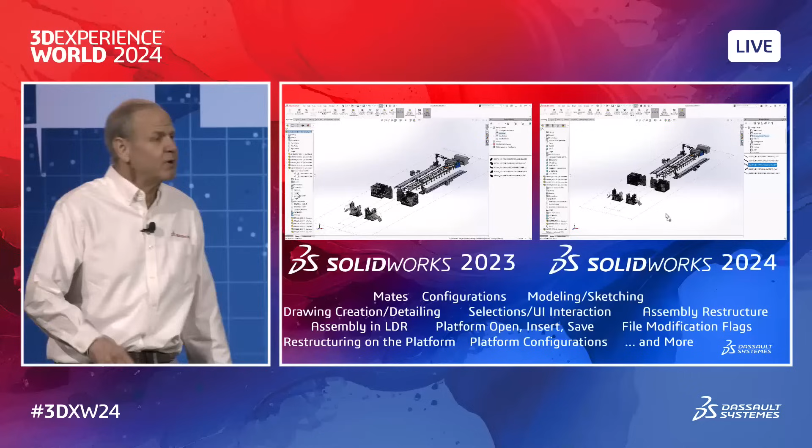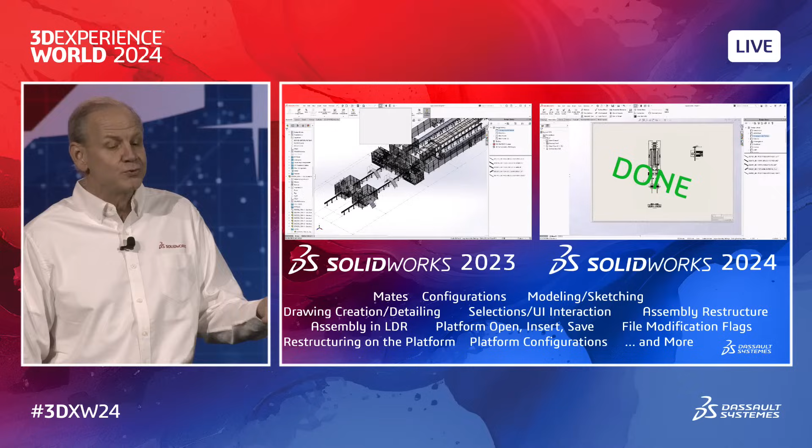You probably know every year we focus on improving the slowest operations, and we typically make big improvements, so users are delighted when they hit those areas. Well, we continued that effort this year, but we also looked at workflows that are most common to all users and focused on improving them end to end. That's what you're looking at on the screen right now. We looked at typical areas like assembly modeling, drawing and detailing, configurations, etc. And on average, we got roughly 30% faster. So now your average user should experience a significant performance improvement. What do you think about that?

Now for the enhancements, and we have some great news, because now we put them in service packs throughout the year. You no longer have to wait for a major release. You'll find a bunch in every SP. For example, we released the step import filter in SP1.

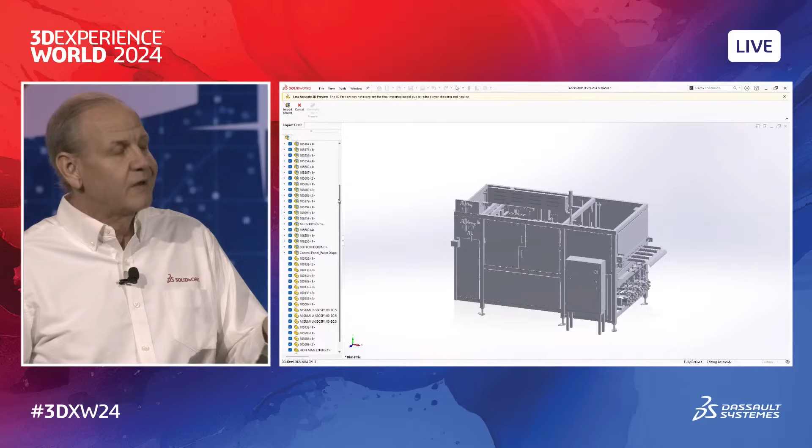If you've ever had to import a huge step file just to use a small part of it, you're going to love this enhancement. Now, upon import, you quickly get a full assembly tree and optionally a graphics preview from which you can select just what you want. And then boom, you get just that portion imported. Saves a ton of time, and it's there in SP1.

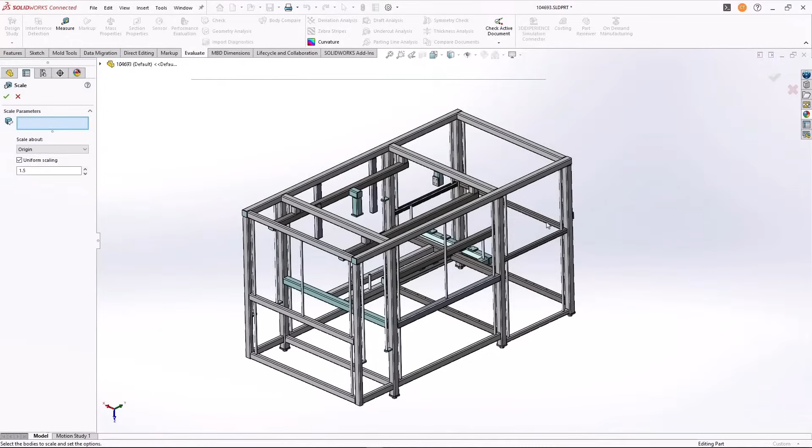But this next one is really cool. We've always had great assembly features, but they only remove material. There are times when you want to add material, for example, modeling weld beads as actual solids, or thick coatings as a solid offset. In 2024, we implemented an alternative way of creating assembly features. You can now have a twin of your assembly in the form of a multi-body part with full associativity. So think about it, this means you can effectively add part features to an assembly, any part feature, ribs, curves, combine, intersect, you name it. So I think people will find a million ways to use this enhancement.

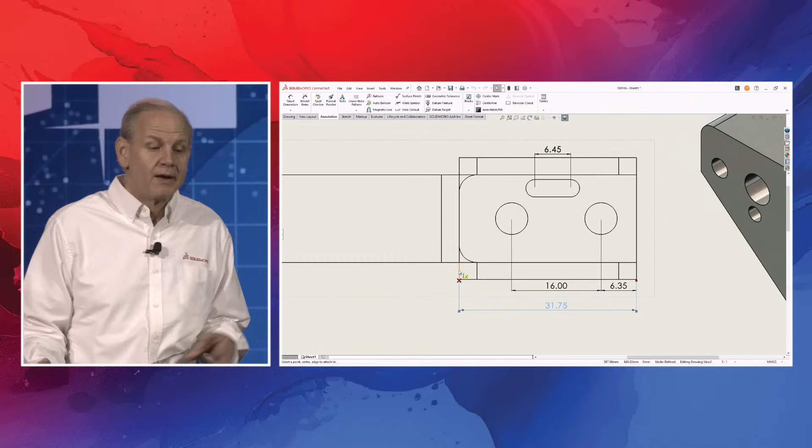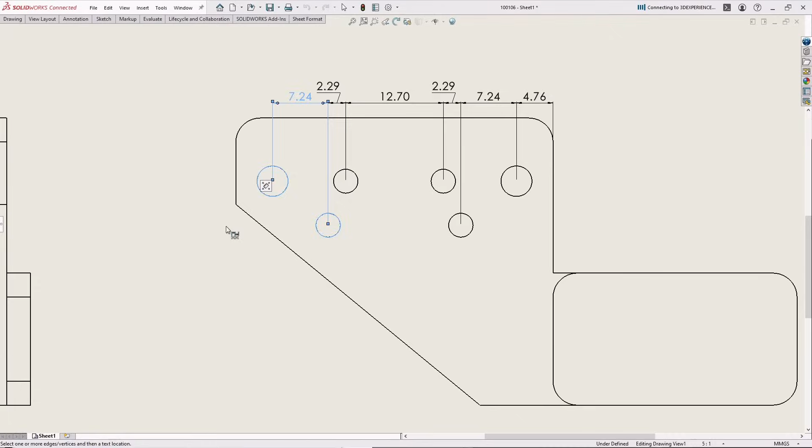Next, drawings. Sometimes you end up with dangling dimensions, for example, if you delete a feature, a face, or an edge that was referenced by a dimension. Now with our improved workflow, reattaching dangling dimensions is easy and it really works perfectly every time. In fact, this stuff is so robust, you can reattach any dimension. It doesn't have to be dangling, so you can repurpose an existing dimension. We also improved chain dimensioning, so all the dimensions stay collinear as you add them. If it gets too crowded as you're adding a dimension, one pops above with a leader that stays consistent with the standard.

But my favorite enhancement: now you can save SOLIDWORKS models back to an earlier release, complete with features. So they're true native models, as if you created them in that earlier release. Now users on different releases can work seamlessly back and forth, editing back and forth. Here you can see a sheet metal part saved back to 22, so the manufacturer has access to all the features, including the flat pattern.

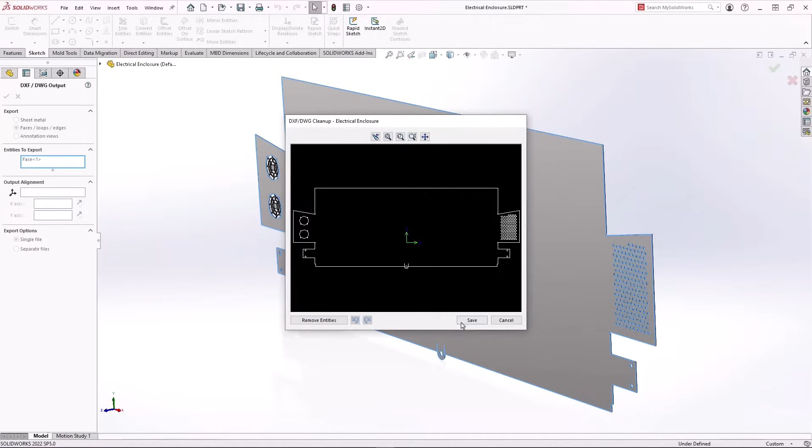Of course, we will continue to add new features to SOLIDWORKS, so we've provided a handy tool to identify any feature incompatible with the previous release so you can deal with it. I'm going to tell you, it's amazing how well this stuff works. It's rock solid.

Those are just a few of the enhancements in 2024. For more info, check out the What's New videos on solidworks.com, and also check out the What's New right from inside SOLIDWORKS help.

All of our enhancements are driven by our user community. So come to the Top 10 presentation on Wednesday afternoon, and you'll see we implemented 35 directly from the Top 10 survey this year.

Thanks, Bruce. And we'll review that work from home policy for you especially, right? Thank you. Let's see if you can continue. By the way, Bruce comes to work every single day, so it's a joke.

And at this point, I would like to invite Sally Alani, who is going to come with Kevin Hopkins and Sam Melo to talk about SOLIDWORKS with the platform. Come on, Sally.

And if you didn't recognize him in this nice clothes, he's the guy who has challenged the product definition team. So Bruce and team, they're under fire. I'm ready for it. Dance off.

Thank you, Manish. Thank you, Bruce. Those were some amazing enhancements. Kevin, you are our very first SOLIDWORKS customer who adopted the 3DEXPERIENCE platform.

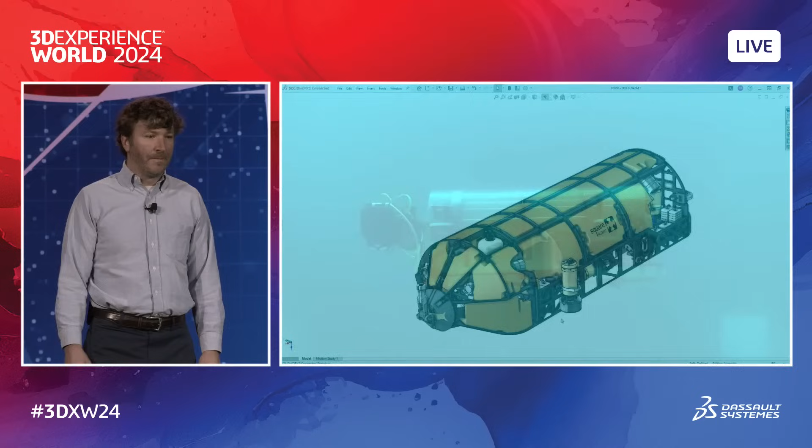Can you tell us more about yourself and Square Robot? Yes, I'll certainly. Square Robot specializes in manufacturing battery-powered robots that are submerged in operational fuel storage tanks. Our robots conduct inspections of the tank floor to identify corrosion and integrity issues. I'm the lead mechanical engineer overseeing the design and construction of our robots, and also manage a team of mechanical designers who extensively use SOLIDWORKS and the 3DEXPERIENCE platform.

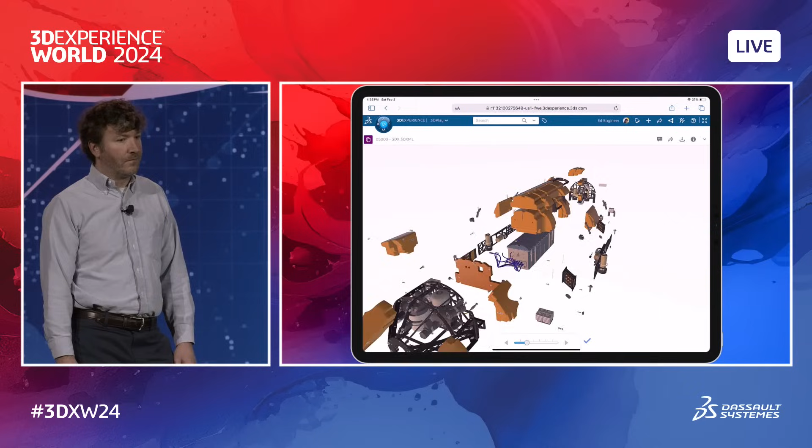Sounds great. That seems to be a very complicated model you have over there. Just out of curiosity, how many components in that design? It's around 4,000 to 5,000 parts. And how is your experience saving such a large data set?

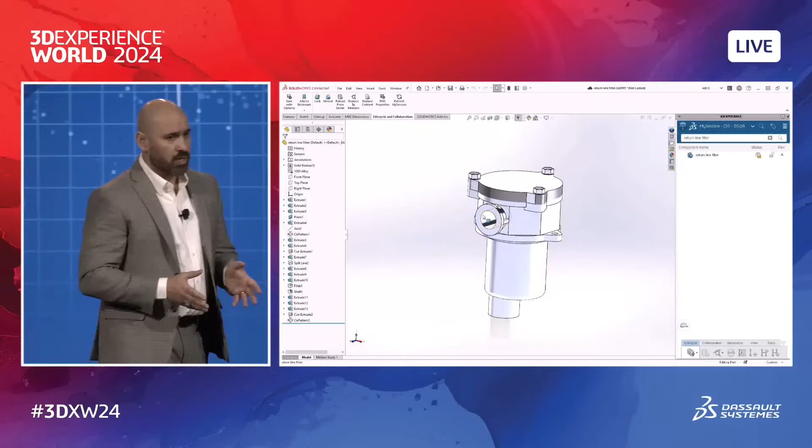Saving large data sets is definitely time consuming. Let me tell you and others who have been in a similar situation like you. Last year, we introduced asynchronous save that helps improve save performance. You can now smoothly save your large data set on the 3DEXPERIENCE platform on the fly, ensuring uninterrupted design progress. This new saving approach lets you seamlessly continue your work as save happens in the background.

This means your SOLIDWORKS session is no longer blocked during save, giving you the freedom to continue your work while keeping track of the save status. I'm in fact proud to even claim that saving to the 3DEXPERIENCE platform is almost as fast as saving to your local PDM.

Sam, you are an existing SOLIDWORKS customer, and you are one of our newest customers on the 3DEXPERIENCE platform. Tell us more about yourself and Coit & Hughes. Thanks for inviting me. Coit & Hughes is an aftermarket manufacturer of plastic and rubber consumables used in nut harvesting equipment. We're located in Modesto, California, which is right in the middle of where 90% of the world's nuts are grown.

The company was started in 2009 after the founders worked 30+ years for other companies in the nut harvesting business. They started making and selling nut rakes out of their garage as a side business. Since then, the business has been on an upward trajectory, and they hired me right out of college in 2016.

So you helped keep those almond milk lattes flowing for all of us. Thanks for doing that. Feeling thirsty already, but I'll save it for later tonight. So can you tell us how Coit & Hughes got started using SOLIDWORKS?

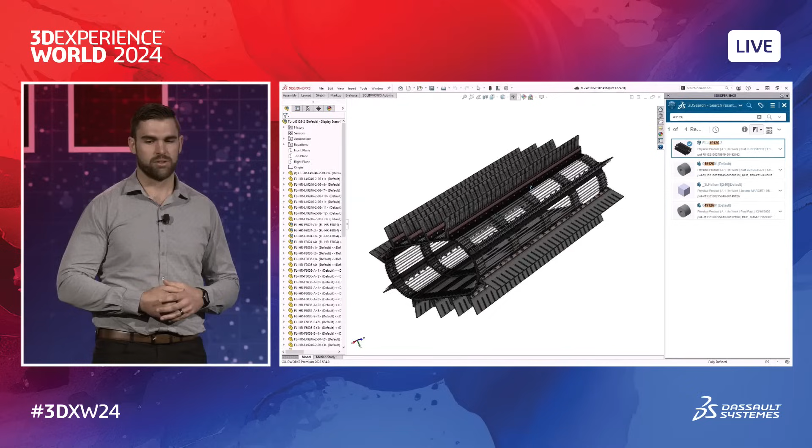When Coit & Hughes started about 10 years ago, SolidWorks PDM was identified as a must-have to manage their SolidWorks data and to not store it on local machines. I started using SolidWorks at Cal Poly, so I was already trained when I was hired.

So, all right, you use SolidWorks and SolidWorks PDM to manage your data. What motivated you to move to the 3DEXPERIENCE platform?

With our previous setup, we started having frequent connection issues to our hosted server because it was getting old. So we either needed to upgrade the server at a significant cost or potentially choose a cloud solution that could propel us for future growth. The benefit of being able to connect to our data from anywhere, anytime, from any device would be a huge boost in productivity for us.

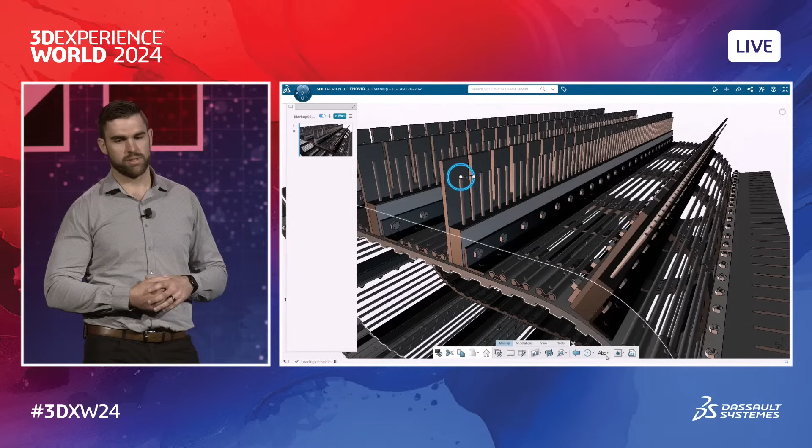When we heard that you have a new migration service available to move our PDM data to the cloud on the 3DEXPERIENCE platform, it was the perfect timing for us. We worked with our local reseller, Hawk Ridge Systems, who did most of the work to help us migrate. They ran a few test scenarios and then did the final migration just a few days ago to our production tenant. And overall, it was a pretty smooth process.

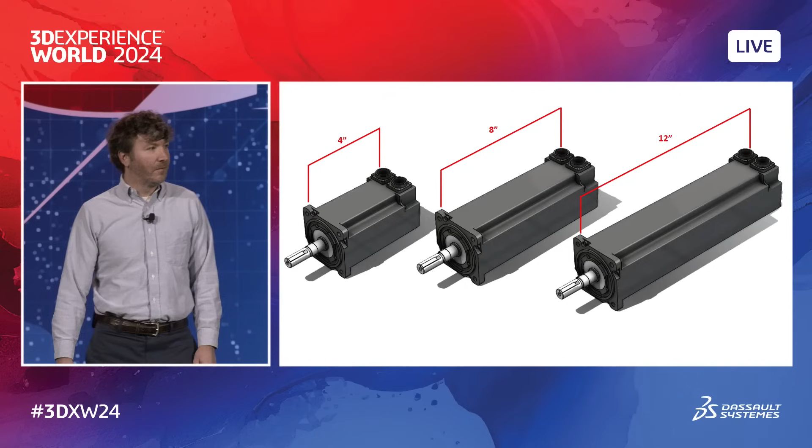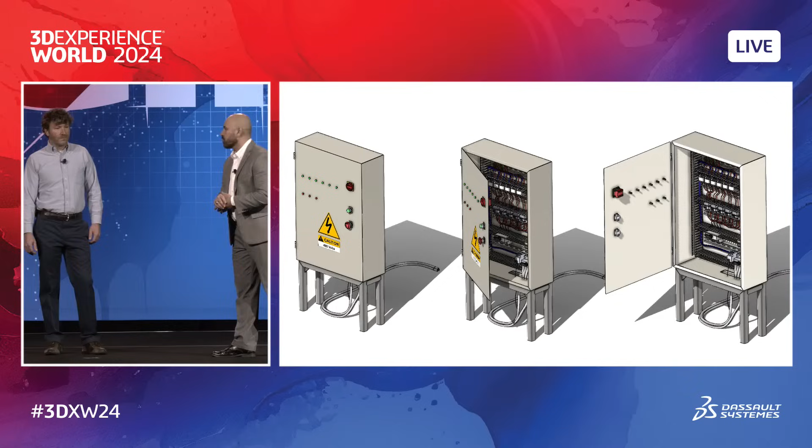Let's look at another one. So these are 3 cabinets. They are all the same, but the position of the door is in a different location. It's basically closed, as you can see, partially open, and fully open. Will you use configuration for those? Of course, yes. Okay, now comes a trick question. Are these different item numbers for you? Actually, no. They're the same item number for me. Will they have their own life cycle? No, they shouldn't. Configuration is not always a unique item, but at times they are.

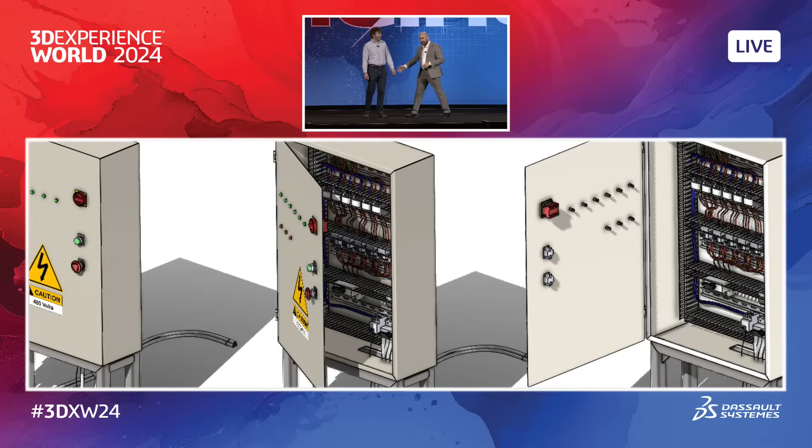It's really confusing. Believe me, you're not alone. Even I'm confused at times. And we have now resolved this confusion.

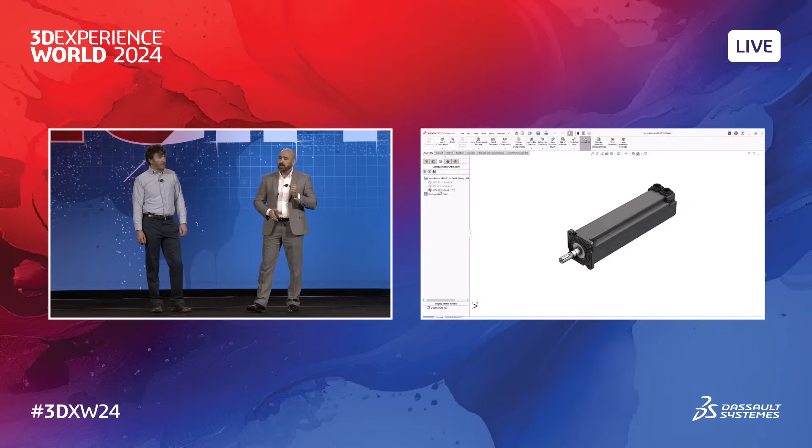So this is interesting. But I have a lot of existing data with configurations already in it. What if I want to use the representation approach on my data? Of course, we have something for you. We've built in intelligence to automatically identify a representation. For example, a flat pattern is just a representation and not a configuration. With the task scheduler, you can automate the process of going over your existing data, identifying and marking those configurations as representation. We believe in making your design journey simpler and more efficient.

Kevin, when you are in the design phase, how do you get feedback from your internal and external collaborators? We are heavily dependent on screen sharing and email exchanges. A lot of our time goes into highlighting changes and explaining it to people on the shop floor.

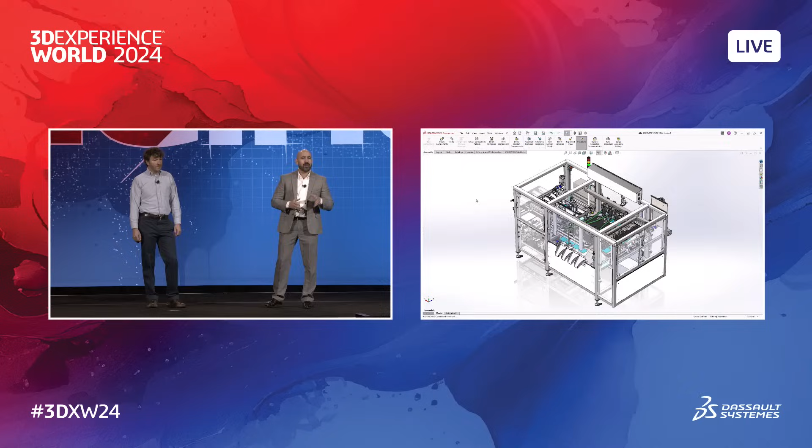I totally hear you, man. Let me show you something. Last year, we introduced the ability to share your 3D design with anyone directly from within SolidWorks and get instant feedback on the fly. This makes working together much simpler and easier, as your colleagues can view, mark up, and comment on your designs directly from their mobile devices without needing to install any software, all within the browser. It helps accelerate your product development process. And even as a designer, you don't even have to leave SolidWorks.

Tell me, isn't that cool? This is very appealing. You know what, Sal? I'm going to test it with my folks on the shop floor.

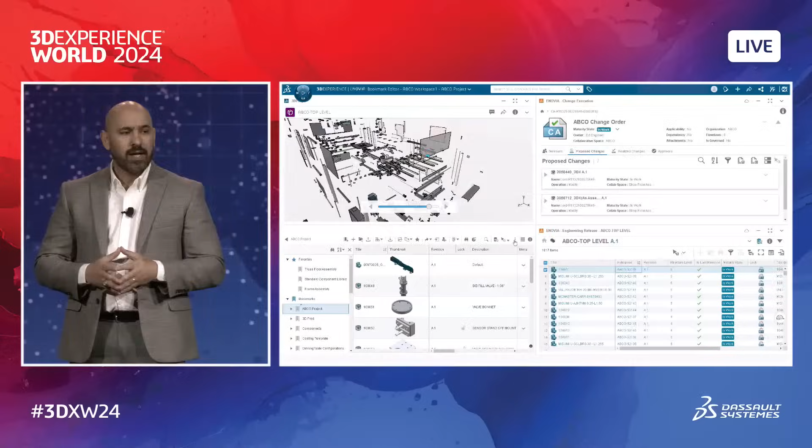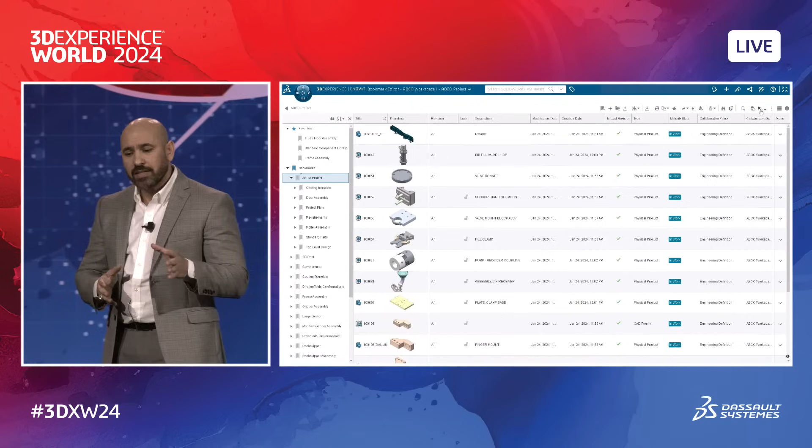And of course, that's not all. The 3DEXPERIENCE platform offers access to cutting-edge PLM capabilities. Connecting to the 3DEXPERIENCE platform provides an entry to the complete 3DEXPERIENCE Works portfolio, allowing seamless manipulation of the entire model, efficient management of the bill of materials, and successful implementation of change management processes in your organization. You have the ability and flexibility to scale up at your preferred pace.

For many of you, 2D drafting is a big part of the design process, whether it's a final deliverable drawing or just a rough layout sketch. These drawings can help you figure out how things fit together, how much space things need, and even how they will move, how they will work when you move them around.

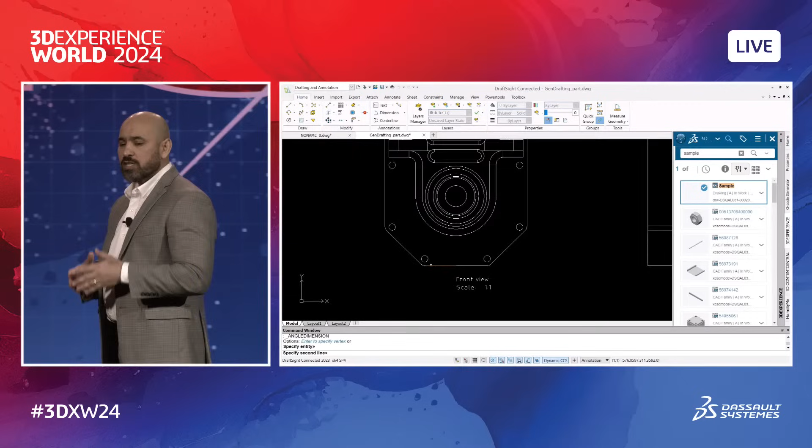We talked to Anthony Fetting from Unisec the other day, who is passionate about how DraftSight, our 2D design tool, underpins his business. He told us how brainstorming in DraftSight saves him a lot of trouble later on when he's designing it in 3D. DraftSight lets him test out different ideas, get quotes figured out quicker, and that helps his business grow.

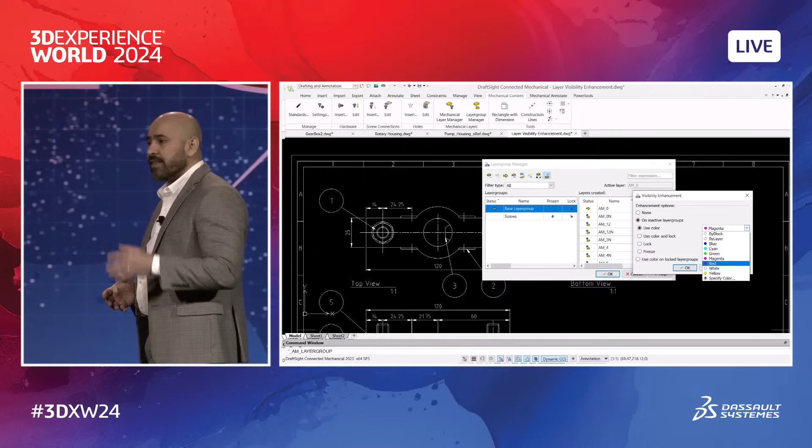3DEXPERIENCE DraftSight is the ideal tool for everyone who needs fast, easy 2D drafting together with a safe, secure location for all your design data, with the tools to enable cross-team collaboration. The 3DEXPERIENCE platform becomes the single source of truth for your design team.

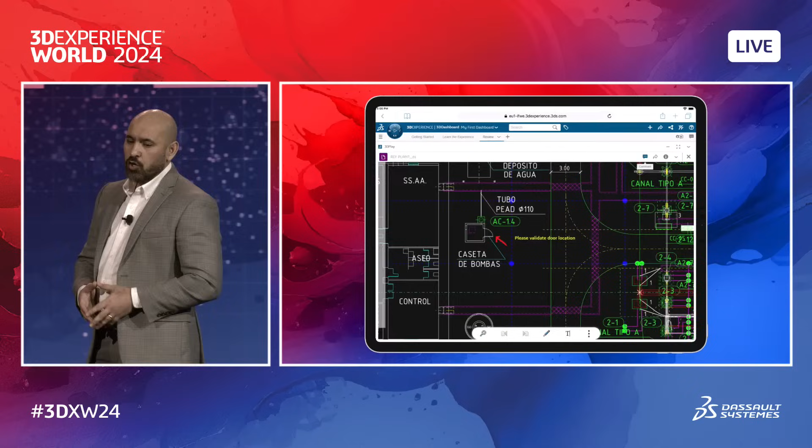It reduces communication errors and promotes accelerating team efficiency. But we all know when you work on a project, sometimes things get messy. When you're out in the field designing stuff, plans change, things break, and suddenly your perfect drawing is no longer perfect anymore.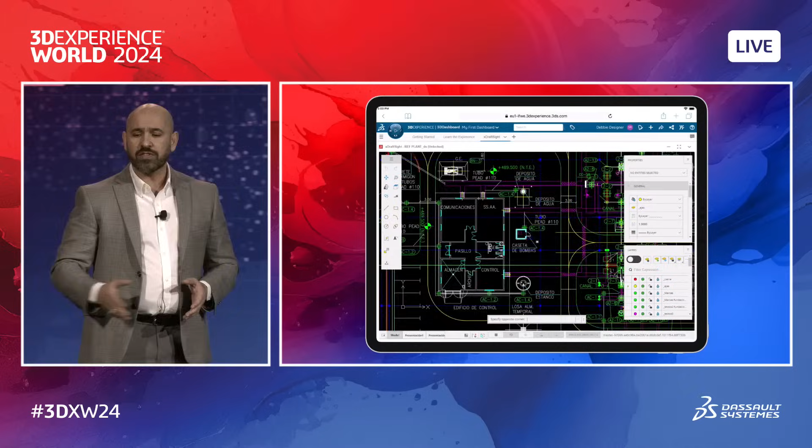To meet this challenge, I'm thrilled to tell you about the upcoming launch of DraftSight Creator, a brand new web-based tool for 2D drafting. It's going to make drawing and creating plans a whole lot easier. With DraftSight Creator, design teams can now work on DWG drawings from any device, no matter where they are. Just say goodbye to being stuck in the office and lugging around heavy laptops.

What you've just witnessed here in terms of enhancement is just the tip of the iceberg. From performance to assembly features, saving to the previous revision, and even precisely defining a representation, we're not afraid to make significant architectural changes to meet your needs.

We also ensure that you can easily bring your existing data to the platform and meet all your collaboration needs within and outside your organization. There are close to 300 breakout and hands-on sessions for you this week to explore.

So that was it for my update on SolidWorks with the platform. Yesterday, you heard about the amazing partnership between Dassault Systemes and Cadence. To get deeper insight into that, please welcome back to the stage Manish Kumar and Saugat Sen from Cadence.

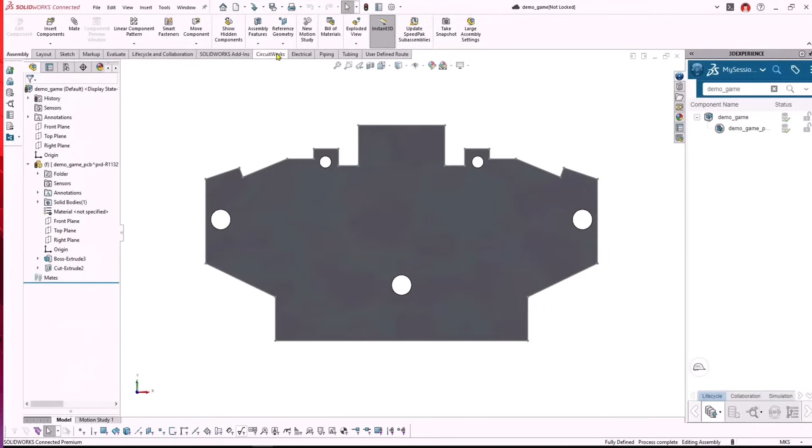Now, in SolidWorks, we will design a bare PCB inside the game controller to reserve that volume for our Allegro X designer, as you can see Saugat is holding in his hands, and then commit the design to the 3DEXPERIENCE platform. And now I can open the same design in Allegro X, Manish, and see all your intended mechanical features.

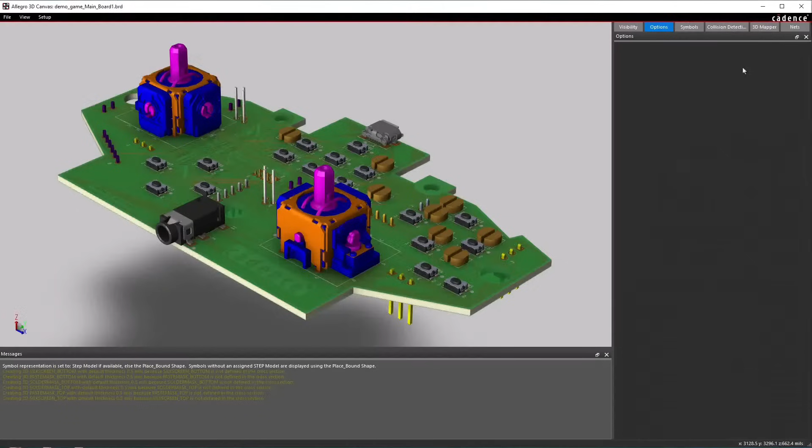I now know how much space I have to place all my components, and also where those key features like those joysticks have to go. Because we're part of the same single source of truth in the same virtual twin, I can identify all my design challenges much earlier in the design cycle.

And after you have saved your design, I just have to pull the updates from that virtual twin on the platform to validate the PCB and make sure that it fits in the assembly.

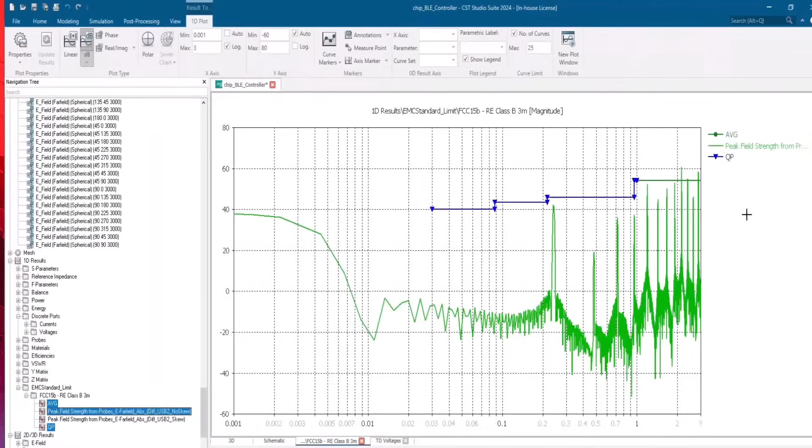And now that we have our single source of truth, we can do some exciting things. For instance, the system can be simulated with the electromagnetics engineer role to show radiation behavior to optimize our controller's Bluetooth antenna. And at the single click of a button, you can push the bill of materials, the manufacturing deliverables, and the design files up onto the platform.

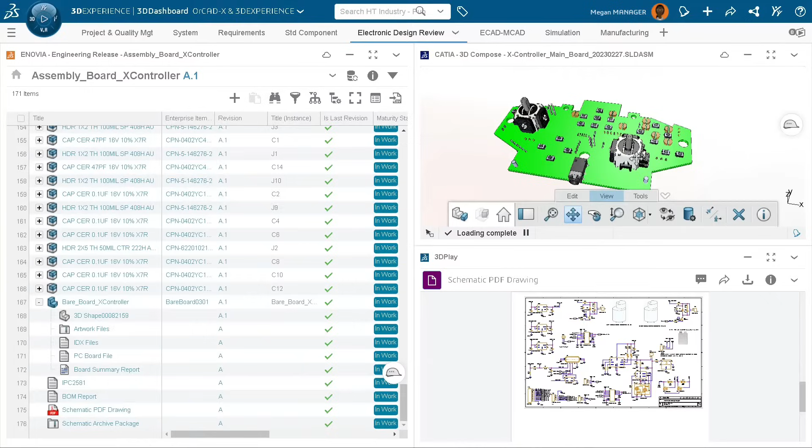Then you can manage the unified bill of material, schematic, 3D, and life cycle of the project via the 3DEXPERIENCE platform.

And it's not just about connecting our software. We are also offering Cadence customers access to the applications on the 3DEXPERIENCE platform. This means more tools and resources at your fingertips.

And we are actually fostering collaboration amongst the designers. Our integrated solutions enable the mechanical engineer and the electrical engineer to work together, blending their domains of engineering in an ideal confluence of form and function.

Indeed, Saugat, the ability to collaborate in real time and have instant access to each other's work will transform how products are designed and brought to the world.

And it is the cloud-hosted integration that enables such access and collaboration in real time with no bounds on the distance. It's a dynamic ECAD and MCAD co-design that's happening in close virtual proximity, regardless of the time and place where the design is accessed.

And that's enabled by the cloud. Exactly, and we are not just enhancing the tools our customers use, we are revolutionizing the way they work. This partnership is the future of electronics product design.

I really like that I never have to keep track of those files that I have to export. I like that the platform notifies me when a design changes. That ensures that ECAD and MCAD can never be out of sync.

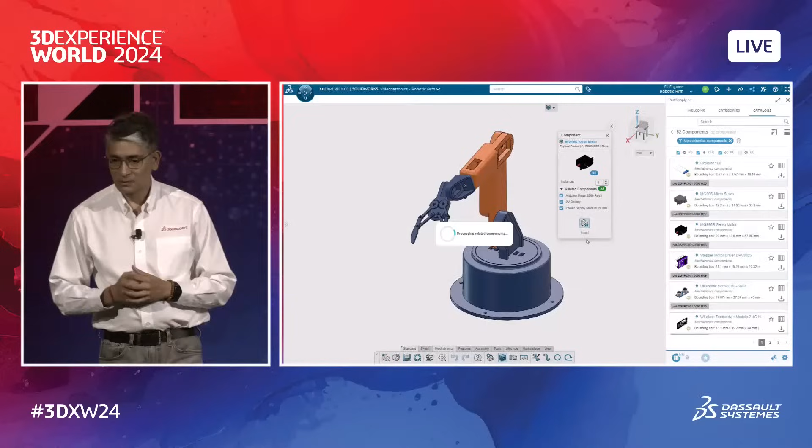Now, yesterday, we also announced another product, xMechatronics, or 3D Mechatronics Creator. The world is transitioning from simple functional devices to multidisciplinary, feature-driven smart devices. And this technological revolution increases the complexity and efforts for designers and engineers. It becomes extremely challenging to manage the life cycle of the product that relies on multiple disciplines, such as mechanical, electrical, controls, software, and more.

It is our job to give you the tools to engineer the next generation of mechatronics devices, and I'm here to give you a sneak peek into our future, into our plans. 3D Mechatronics Creator will help you deliver the next generation of smart connected experiences in a collaborative way powered by the 3DEXPERIENCE platform.

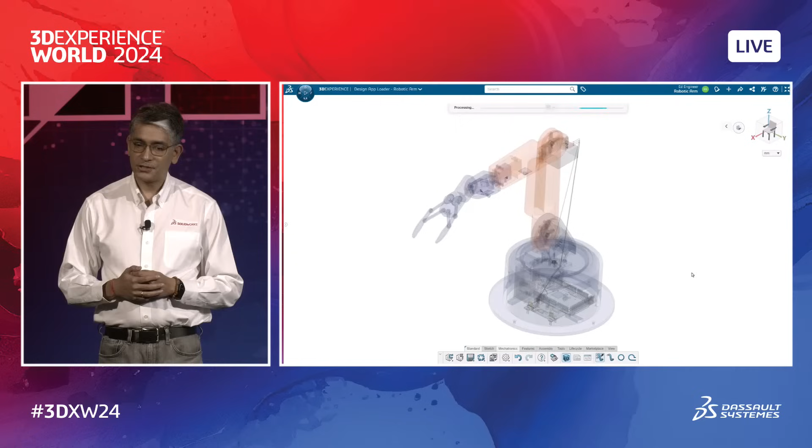Now let's move to our next section. We are going to talk to you about our experience creation on the platform. So now let me introduce you to Chris Paliriani.

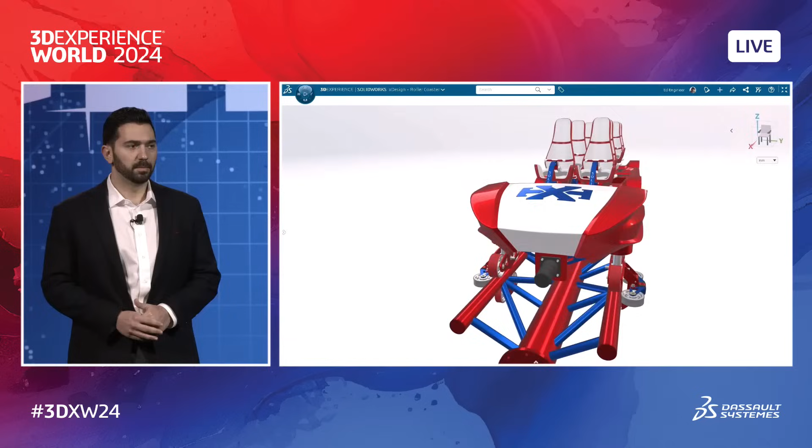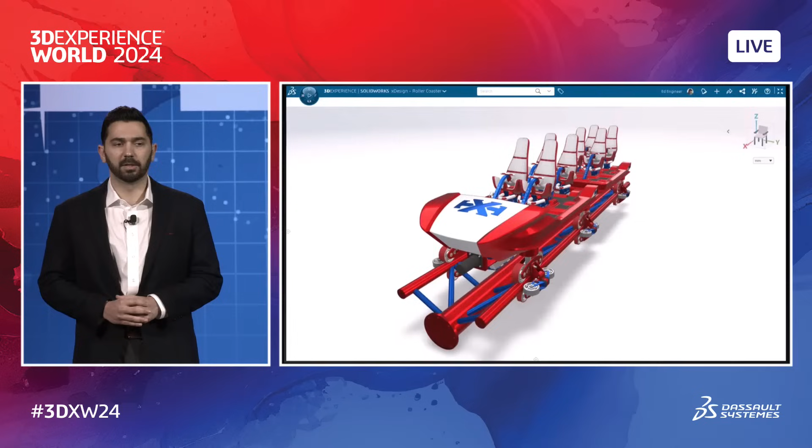In today's fast-paced and interconnected world, it's evident that product development doesn't just happen within the confines of an office. The demand for a design platform as flexible as our ideas has never been greater. We need a solution that adapts to us, that works anywhere, anytime, on any device. Enter Solidworks Cloud, a dream come true for agile engineers who are reimagining how we design, collaborate, define, and market product experiences. It acts as a catalyst for seamless collaboration and design excellence, offering a comprehensive suite of cloud-based tools optimized for any device, without the hassle of manual updates or installations. The platform fosters frictionless design, encourages efficient teamwork, and empowers you to create truly remarkable product experiences.

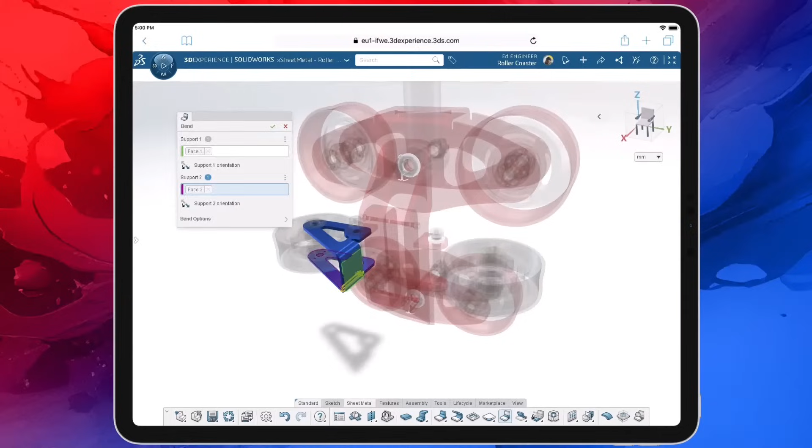Solidworks Cloud opens up a world of design freedom. The single modeling environment helps you gain a remarkable advantage of unstructured workflows. Say goodbye to upfront assembly planning or being bound by separate parts and assemblies. Here, you can form and dissolve just about anything. Parts seamlessly transform into assemblies, and assemblies transform into parts, all without the complexity of leaving your environment once. This dynamic approach gives you the freedom to innovate and adapt your designs on the fly, and the result is unstructured innovation. It's truly one of those capabilities that once you have it, you can't live without it.

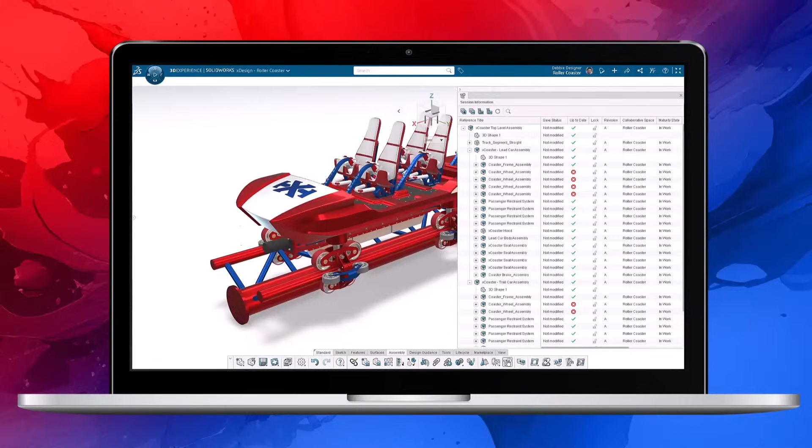Design flexibility is really just the beginning. We believe that collaboration is the cornerstone of innovation. Real-time push notifications for updates ensure that everyone has access to the latest designs and is immediately aware of changes, eliminating the complexity of manual check-in and check-out processes. Cloud-sourced data and simultaneous editing on an always-connected platform keeps you and your team in sync, creating a dynamic environment where creativity and innovation flourish.

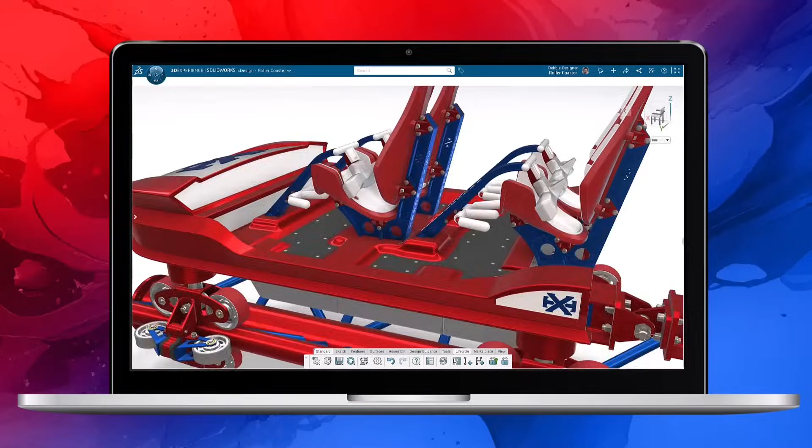If you can't tell, we're all about maximizing your efficiency and productivity. So of course we have built-in data management to keep you organized and eliminate the fear of losing files. This means effortless revision control and swift design modifications without the need of cumbersome and messy local file management. With design and lifecycle integration, you can work in context of your complete product and release parts or assemblies all without disrupting your flow through the opening and closing of different documents.

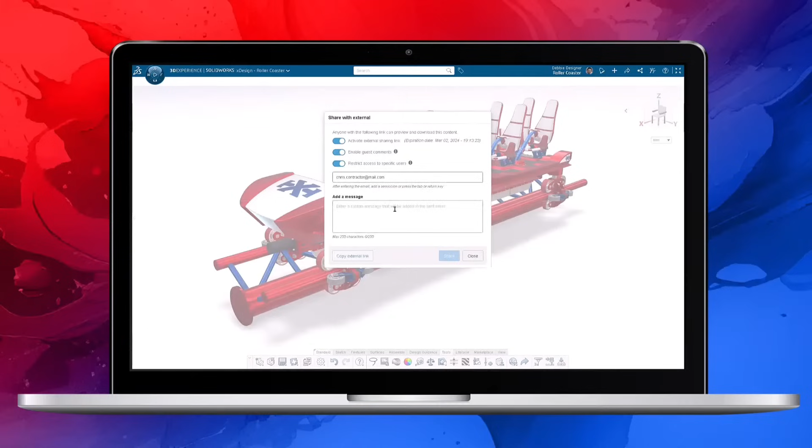When it's time to bring your product experience to life, sharing has never been more straightforward with a single interface for all internal and external sharing. Conveniently empower your network of suppliers with connected external sharing, and supercharge the decision-making process with comprehensive round-trip collaboration between you and your crucial stakeholders. On the go, stakeholders get full access within their given permissions to review, mark up, and explore your designs in 3D Play with simple, intuitive navigation and model interaction.

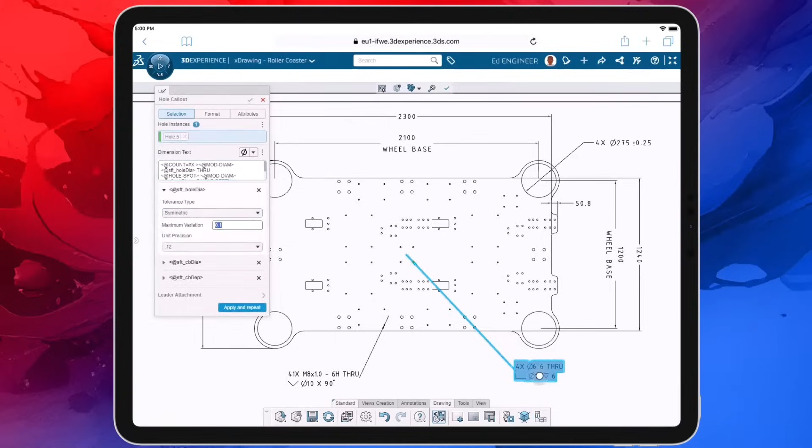Remember when I mentioned reimagining how we define product experiences? Well, we've done just that by challenging the status quo that drawings and MBD have to live alone, and only one form of definition can exist within a company. We've combined drawings and model-based definition into a single user-friendly interface. This means one environment for both traditional drawings to provide that comfort and familiar process, and model-based definition for that intuitive 3D collaboration and downstream automation.

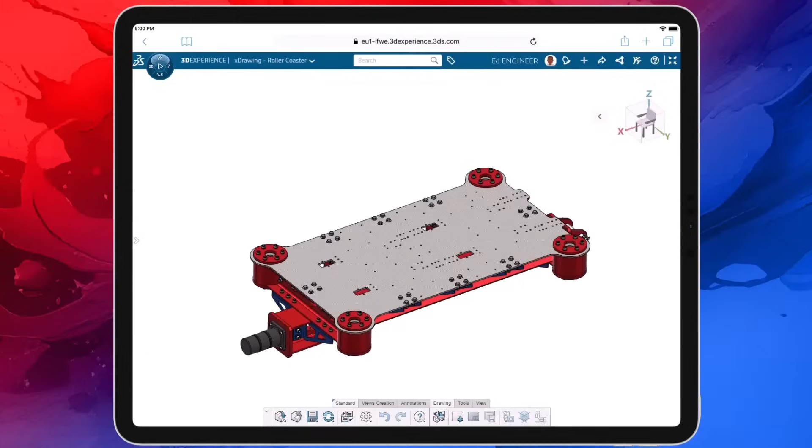What's really more is as you define your drawing, the 3D product manufacturing information is automatically generated, creating a single source of truth. Yes, you heard that correctly, 2D drawings that drive 3D annotations, and vice versa, from 3D to 2D. You get to define it your way, just once. Whether it's in 3D or 2D, the choice is yours. This flexibility ensures that you can deliver the output that best suits the needs of your organization and your downstream network with zero additional rework.

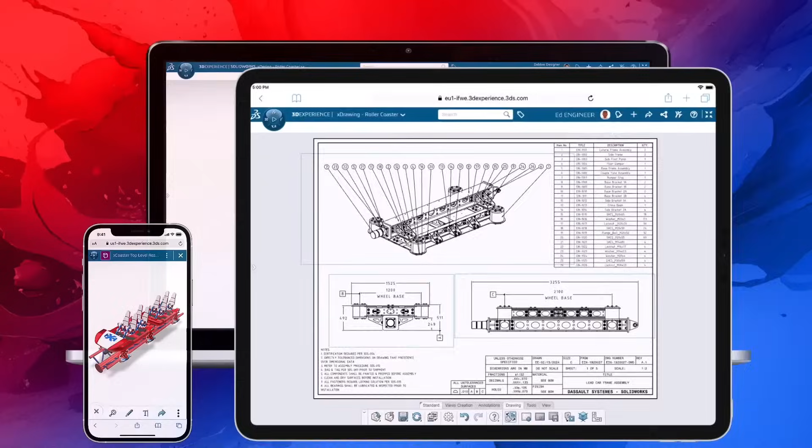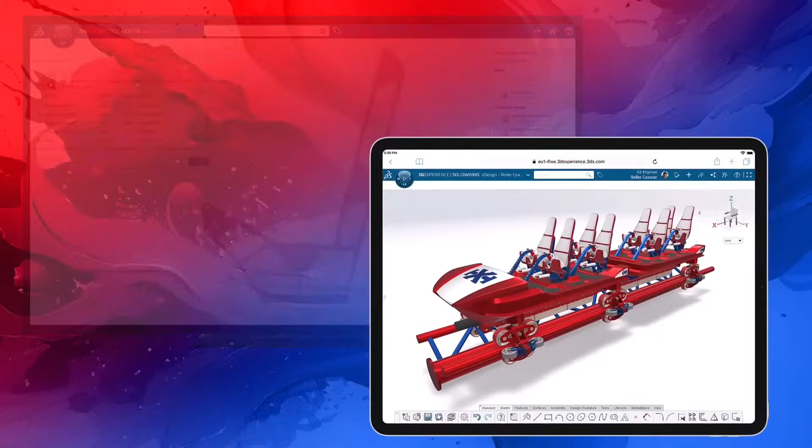Now, the possibilities don't stop there. Whether you are working with the platform or on the platform, there's a solution for almost every design challenge imaginable. Take the challenge of 3D printing, for example. The amount of time and material it takes is often a barrier compared to traditional machining. One way this can be addressed is with CATIA Lattice Designer. Utilizing your Solidworks data, you can generate optimized, lightweight parts to save cost when using additive processes. The high-fidelity, watertight output is readable by any additive machine. With a simple solve, your optimized lattice component is automatically updated in context of your assembly.

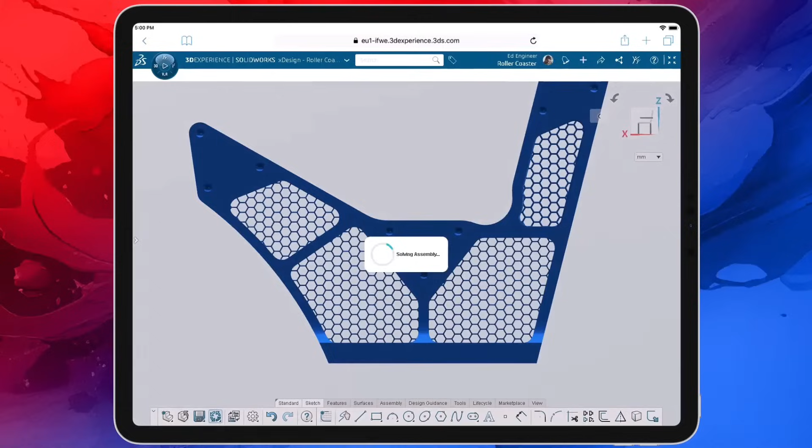Now, you probably expected it to update, but I bet you didn't expect this. Users can actually make design changes on the fly in SolidWorks Cloud on any device and automatically regenerate the lattice structure without ever actually needing to open the Lattice Designer role.

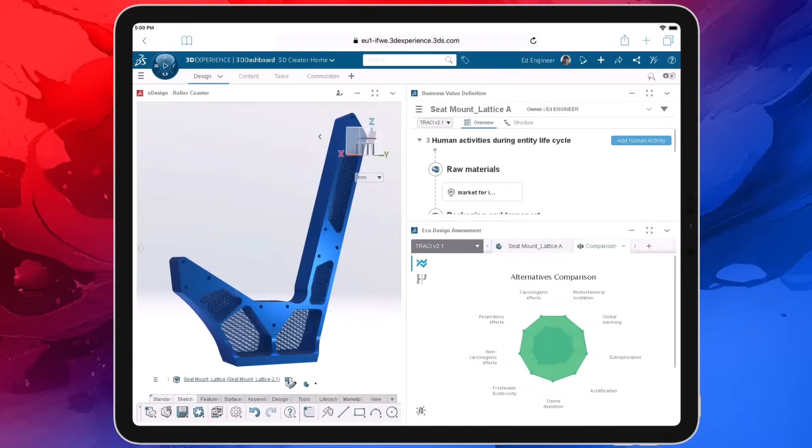With CATIA Eco Design Engineer, you can ensure that your product meets environmental regulations while understanding the deeper impact that it has on the environment around us. From raw materials to manufacturing processes, Eco Design Engineer comes with a catalog of thousands of different activities to assess the impact and presents you with a scorecard outlining the environmental cost and carbon footprint your product will have throughout its lifetime.

Now, let's face it, I trust everyone here is excellent at what they do, but there's always room for improvement. And the best way to optimize any product is through experimentation.

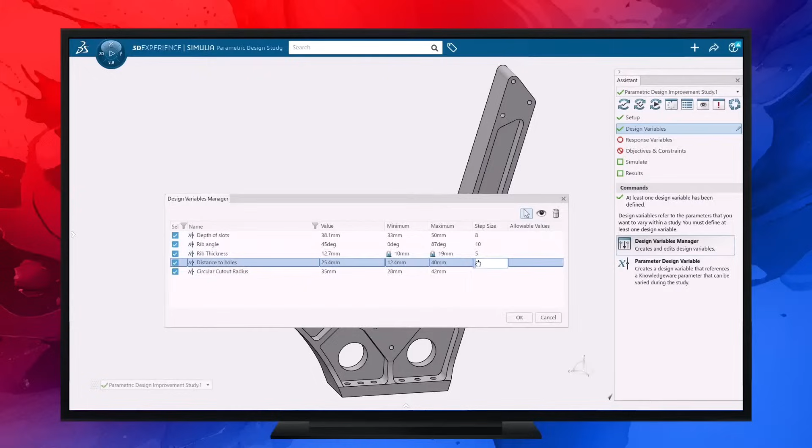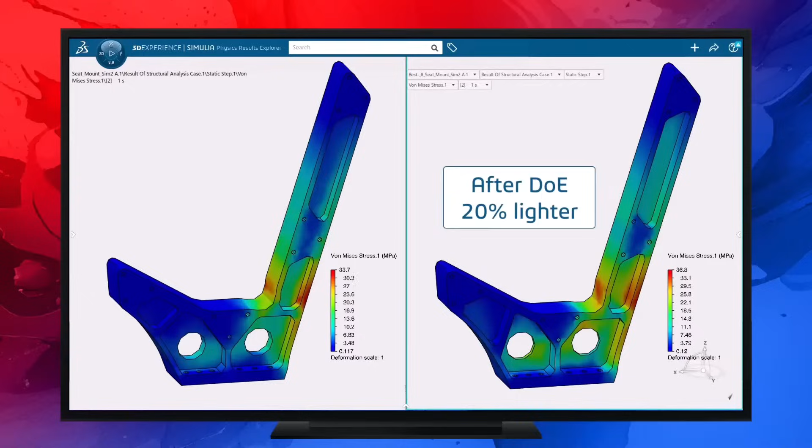With the same example on a traditional machined component, design of experiments lets you run virtual experiments with defined constraints and objectives to automatically generate hundreds of different design alternatives. In no time, you are presented with a visual breakdown of each alternative's performance, ensuring important interactions are never missed.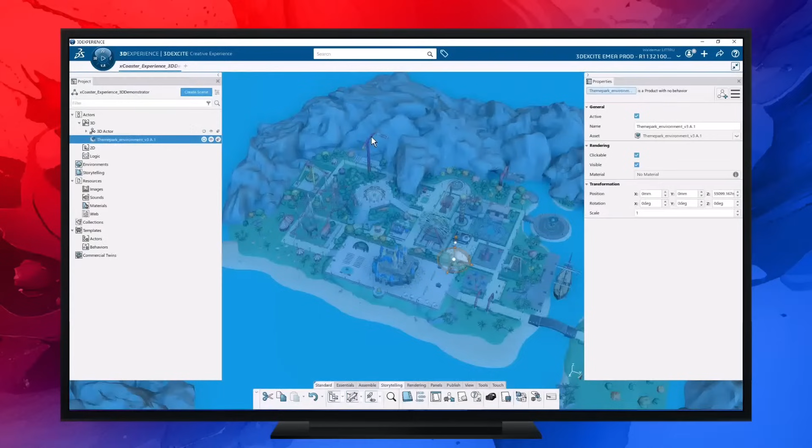Now, a product is never real until it's manufactured. So take your designs to the next level with Delmia. Elevate and optimize processes such as nesting for sheet metal, which includes easy-to-use toolpath programming, and best of all, zero data translation.

From concept to production is really a beautiful experience that you should be proud of and utilize to deliver a memorable experience to your consumers. The artist-friendly 3D Demonstrator role allows you to deliver breathtaking virtual experiences that invoke emotion in your audience. Consumers today want to connect with your product. They want to feel the difference it's going to make in their lives before making a purchasing decision.

3D Demonstrator does just that, giving you full virtual experiences to test, visualize, and market your products in new, never-before-seen, innovative ways. From reimagining design and collaboration to embracing sustainable practices and optimizing manufacturing, SolidWorks Cloud and the 3DEXPERIENCE platform opens doors to endless innovation. So seize this opportunity. Reimagine your design process, and together let's shape a future filled with limitless possibilities and unforgettable product experiences.

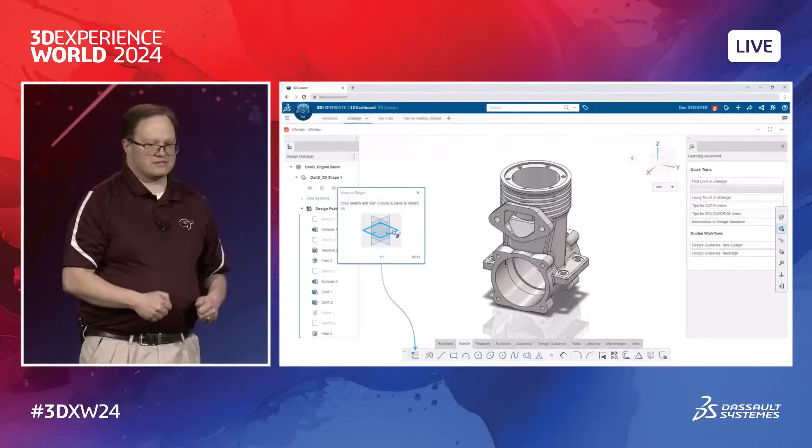I've even seen some 3DEXPERIENCE certifications. How long have you been teaching with the platform? We've been using the platform since COVID hit in March 2020. When school shut down and students were displaced at home, we had to adapt, and we had to do so quickly. The platform was there right when we needed it. So which apps do you and your students use?

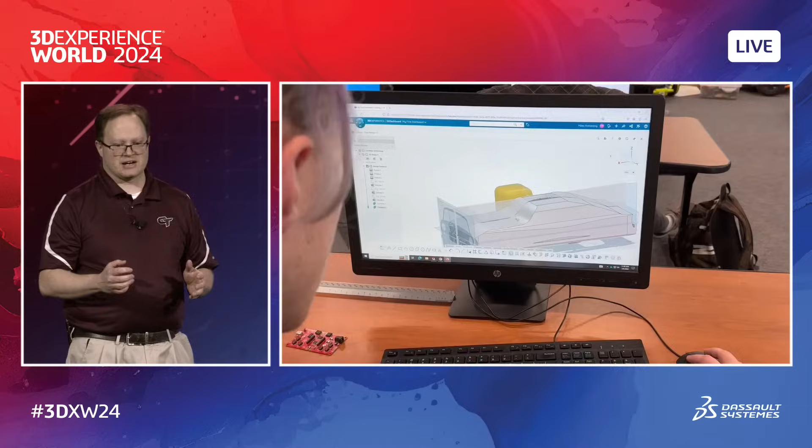We use a lot of the X apps to varying degrees. We also use Solidworks Connector to help link our EDU edition to the platform. We use X-Shape with the Lego kit project I do with my first-year CAD students. My second-year engineering design students are using X-Shape at a deeper level to be able to make mini cars, aka Hot Wheels.

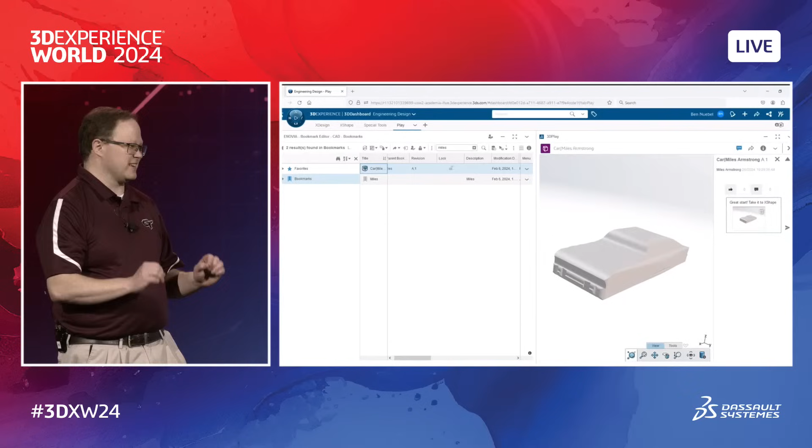From your perspective as an educator, why is it so important for other educators to teach using the platform? The platform allows me to virtualize my teaching, giving more tools to help connect with my students. Being able to use any device is key, as students still need to be able to learn when they're at school or home. Since it's a true platform, we're able to get students working together in a more collaborative way than we previously could.

So while we were off stage, you were telling me about some pain points that teachers have as they teach. So would you mind telling us a bit more about that? Sure. I love teaching. Course management takes up a lot of my time, though. Creating curriculum, sharing course materials, having students submit assignments, grading them, all using different systems.

What if I told you that all that and more could be addressed by a platform app specifically designed for educators? Really? Yeah, so with our new technology, our teacher app, you can capture, use, and reuse curriculum every semester while managing students much easier.

Efficiently create courses and classes and invite students with the roles that you choose, just with a few clicks. You can also add course materials to each module, which automatically releases as you progress each week through your courses, guiding your students every step of the way.

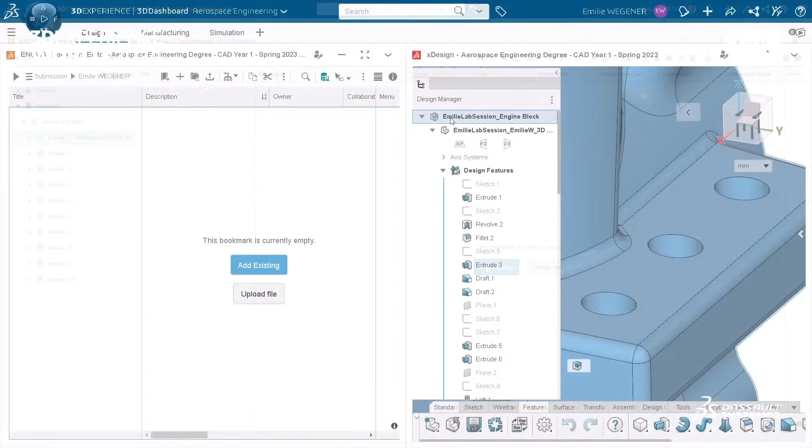You can also make your life and your students' life better, students can submit assignments directly on the platform, and teachers can review, mark up, have feedback for those students privately. So what do you think? That's amazing. Can I take that back to Colorado with me?

Well, we still have a few more things that we have to finish up, but it will be included in your EDU platform subscription later on this year.

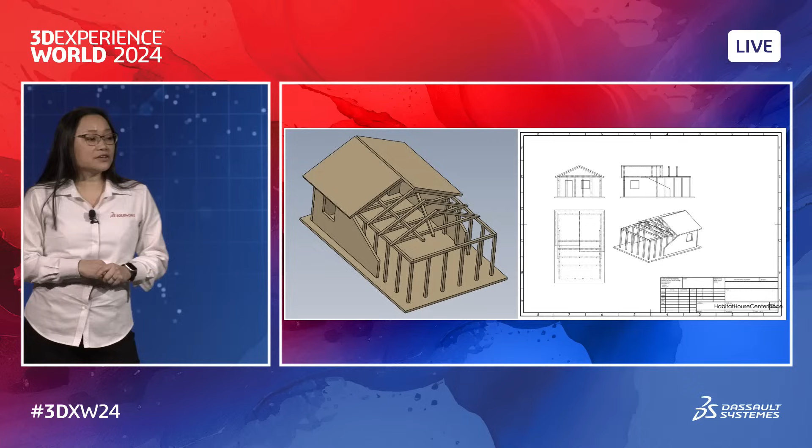So of course, Rick jumped onto Solidworks and wanted to formulate his vision. He wanted to capture the idea, all the stages of a build in a single sculpture that can be placed on the table. And he knew that having a 3D model could help him communicate this with his diverse team.

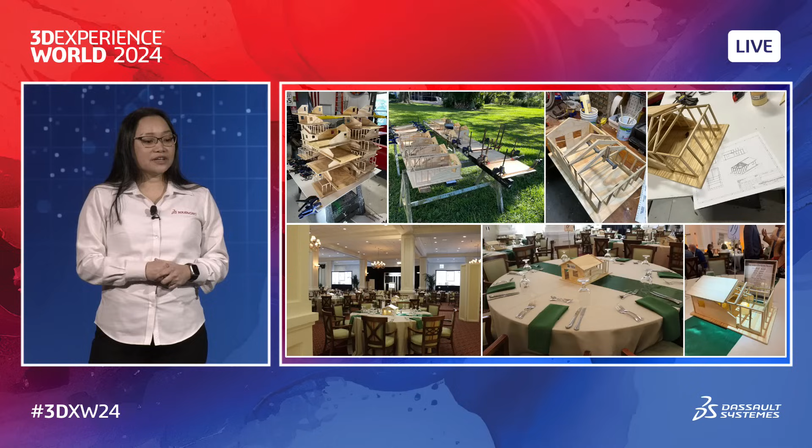With this team on board, he continued to create 33 instances of these masterpieces. These were such a great hit. They will be continuing to use this in future Habitat for Humanity benefit events for people in need.

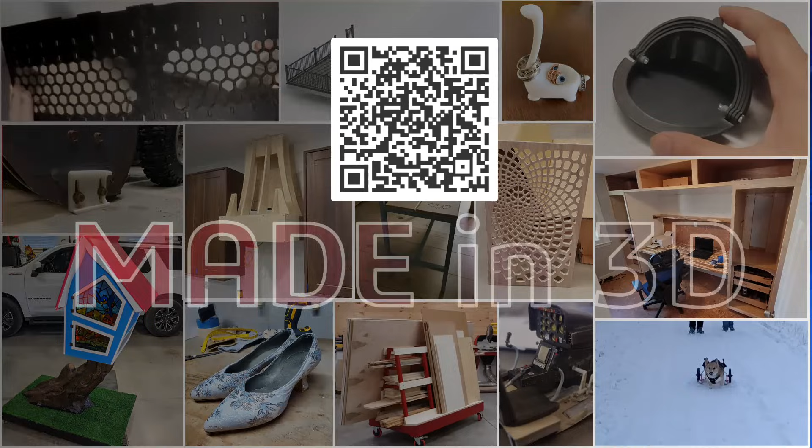And here to tell us more about it are my friend Jonathan Harrison and my partner in making and life, Sal Lama.

Welcome. So Johnny, you're not a stranger to Solidworks. You taught yourself 10 years ago, and you lead a user group. Now you're starting to blog about your passion projects. Can you tell us what you're hoping to get out of these blog series?

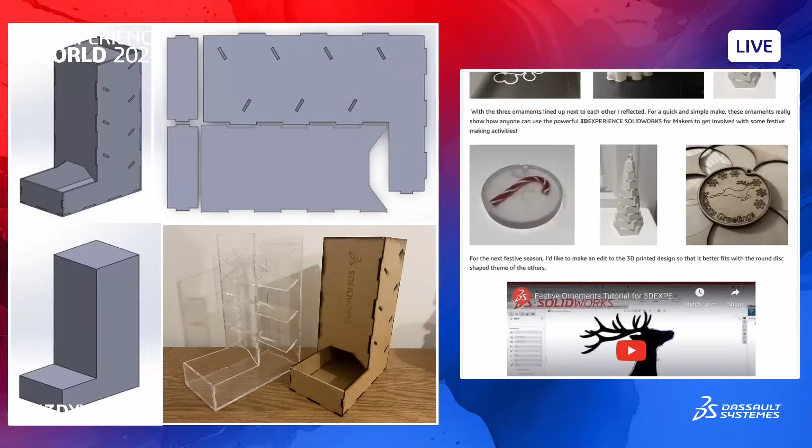Yeah, being able to make things on the weekends and evenings lets me have fun with Solidworks, whereas during the day I have to be very professional and accurate with it. When I started learning Solidworks, I remembered it was helpful to begin with features like extrude and revolve. So for these blogs, I introduce simple features within Solidworks and create basic patterns so that anyone with common workshop tools can follow along.

I know, this is such an amazing way to teach makers new skills. And this year at the Maker Zone, we're also hoping that attendees will learn some new skills as well. You've been partnering with some other makers to bring us this incredible interactive experience. Can you tell us more about this?

Yes. So within the Maker Zone this year, we're giving attendees the opportunity to make their own robotic droids. I worked with Matt Long to quickly produce a usable design, and we've created 4 chassis designs which makers and attendees are able to assemble, solder electronics, and race these around a circuit.

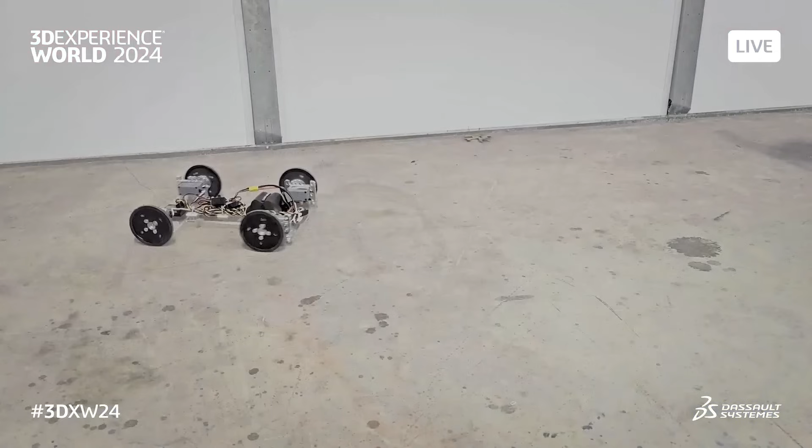That's amazing, I can't wait to try this out. Hopefully you guys will get a chance to go to the playground and also build a droid for yourself. Thank you so much, Johnny, for all of the contributions you've made to our maker community.

Also at the Maker Zone, you get to play with a one-of-a-kind puzzle box experience. Now this is your brainchild, Sal. Want to tell us more about it? I'd love to. Thanks, Chinlo.

We'd be willing to bet that many of you enjoy solving puzzles. In the Maker Zone, we built puzzle boxes that you can visit at the Our Next Make booth. These boxes have a very unique way of opening the puzzle. You scan a QR code that brings you to a virtual model with intricate details on it to help you solve the puzzle. This is our easy box. There are a few more challenging boxes in the Maker Zone for you to try out.

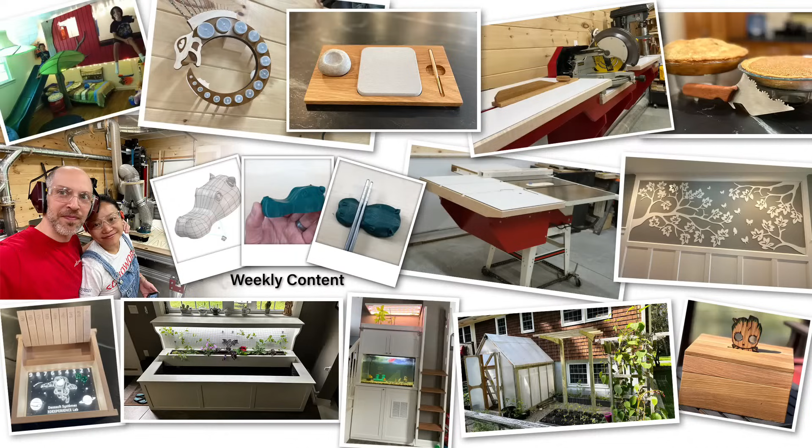But this is just one of the examples of the projects you'll find on Our Next Make, which is a channel that aims to inspire people to make the things they want to see in their lives. In each episode, you'll see how you can use SolidWorks for makers to design anything you can imagine, and you'll learn maker skills to give you the confidence to tackle any project.